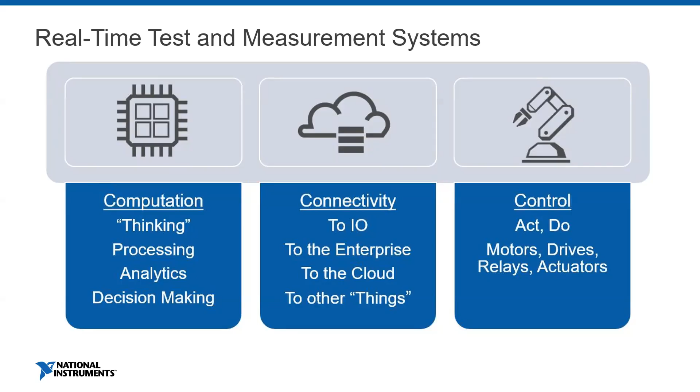Cuando hablamos de sistemas de test y medida, pues son muy amplios, por supuesto. Entonces, los ejemplos, algunos de los que da National Instruments, los pone muy de ámbito industrial. La verdad es que yo he visto también sistemas de tiempo real totalmente válidos en laboratorios de investigación, laboratorios docentes incluso. Simplemente aquellos que se necesite esa recogida de datos, una computación y una respuesta dentro de un tiempo límite más o menos asignado, que puede ser un segundo o puede ser un microsegundo, pero hay un tiempo.

Entonces, lo tenemos en el domicilio particular también, en casa lo tenemos. La lavadora tiene que funcionar controlando ese giro del tambor a unas velocidades, unas RPMs controladas, si no destrozaría la ropa del interior. Entonces, cuando ponemos los distintos programas de la lavadora, del electrodoméstico, pues estamos asignando unos parámetros y esperamos que ese dispositivo cumpla con esas especificaciones técnicas.

Entonces, no solo es industria, donde se necesita una alta velocidad de entrada y salida, una matemática muy compleja también, sino también la confiabilidad de que ese aparato va a durar años sin fallos. No solo que la medida esté asegurada, eso ya es habitual en National Instruments, la precisión y la accuracy de la medida, sino también ese determinismo en la aplicación.

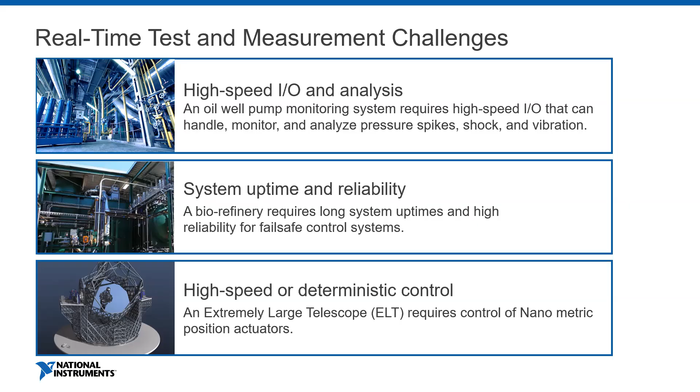¿En qué se basa? Tradicionalmente se basa en un acercamiento o una posición basada en CPUs, en procesador, donde el dispositivo, el sistema, el banco de ensayos, va a tener unas entradas y unas salidas hacia la instrumentación, todos estos bloques azulados: primero unos bloques hardware, un bloque de sistema operativo, los drivers y el software de aplicación. Y normalmente reside todo lo que es el cálculo, la algoritmia, nuestro IP, en este último bloque de la CPU.

Sin embargo, este tipo de acercamiento tiene unas limitaciones de determinismo y de tiempo de respuesta, del orden de unas cuantas decenas de microsegundos en el mejor caso. Habitualmente es bastante más lento, ya que los cálculos suelen ser más engorrosos o hay más capas intermedias entre el sistema operativo, los drivers, el software de aplicación, se conecta a la red, vuelve. Es decir, de microsegundos salta fácilmente a milisegundos y a segundos.

Hay situaciones en las cuales sabemos que esto no es permisible. Recuerdo hace unos años, cuando quería controlar un motor, en ese caso era de Maxon, y ese motor lo intentaba controlar a baja velocidad, ya que me lo permitían los parámetros, el software, la programación, la API. Entonces, sin embargo, le oía un zumbido.

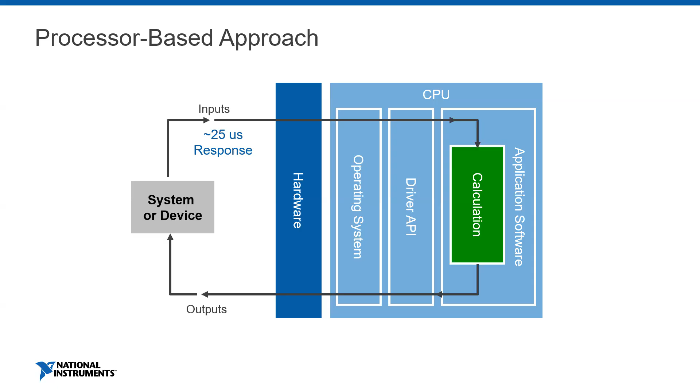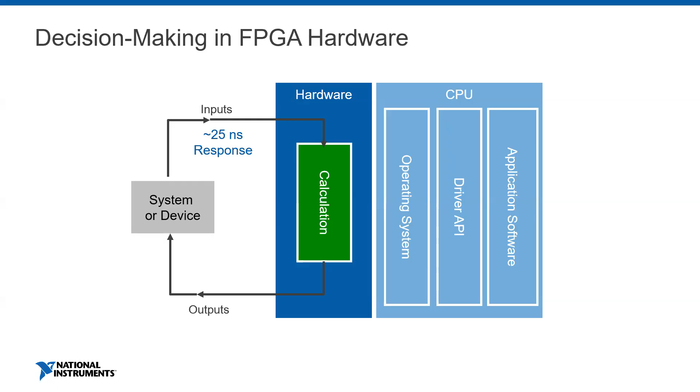Entonces hay situaciones en las que esta CPU no es capaz de llegar. Necesitamos desplazar parte o la totalidad, siempre que se pueda, de los cálculos hacia el bloque hardware, que tiene tiempos de respuesta órdenes de magnitud mejores que los basados en CPU. Obviamente esto es solo una parte de la toma de decisión que se traslada al hardware. Hay otra parte que debe quedarse en la CPU, pues debe comunicarse con otras CPUs en red o hacer otros algoritmos que el hardware no sea capaz.

National Instruments en 2004 salió al mercado con una arquitectura heterogénea en la cual combinaba distintos elementos. El primero de ellos mantenía esas entradas y salidas modulares con todo tipo de señales. Poco a poco le ha ido incorporando el resto hasta llegar a módulos de seguridad funcional con sus certificaciones correspondientes, condicionamiento de señal, puntos de entrada y salida de laboratorio e industriales, con características industriales, etcétera.

El segundo elemento, que era novedoso —no como tecnología, porque las FPGAs, los chips de silicio, Field Programmable Gate Arrays, existían desde hacía muchos años— era la primera vez que se incorporaban en tecnologías de propósito general, y con una forma de programación, que veremos más adelante, tan de alto nivel, tan sencilla, abriendo la puerta a todo tipo de científicos e ingenieros para poder utilizarla.

El objetivo de este chip era poder realizar controles determinísticos de muy alta velocidad, mejorar la confiabilidad del sistema y permitir una extensión del hardware de entradas y salidas que hemos mencionado antes, para que ese hardware acabara no en el dispositivo inicial, no en la instrumentación inicial, sino en esta FPGA. Hoy hablaremos sobre todo de este bloque.

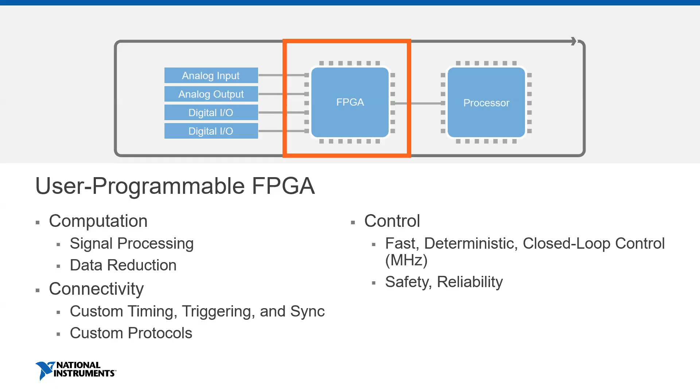Y por último, no menos importante, ese procesamiento de tiempo real, con la capacidad de programar igualmente con lenguaje de alto nivel, sencillo, como pudiera haber sido desde hacía muchos años ese LabVIEW de Windows o en Mac OS al principio, y con todo tipo de librerías, de algoritmia, de patrones de diseño, elementos de conectividad, redes, laboratorio industriales y de comunicaciones e instrumentación, etcétera.

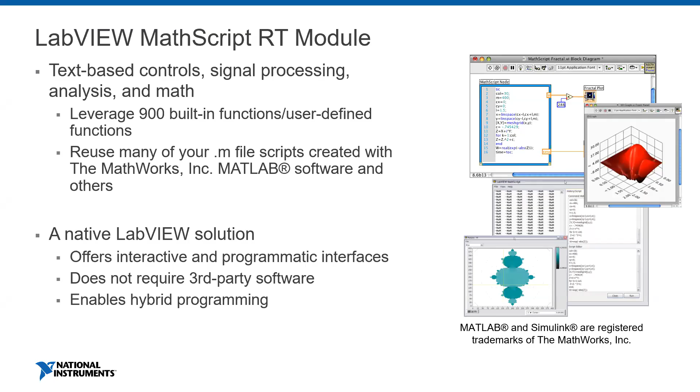LabVIEW Real-Time incluye muchísima matemática, y entre ella también la parte de matemática textual con el MathScript. Este código queda visible, es decir, no es necesario compilarlo, generar DLLs, y directamente lo tendríamos visible en el VI, y directamente lo podemos compilar y poner en marcha, de forma que esa depuración de código, ese ir y venir desde la idea hasta el producto, se acelera muchísimo. También tiene la capacidad de combinarse con otros entornos de programación y simulación, tipo MATLAB, tipo Python, etcétera, que ya lo hemos mencionado.

Otros módulos interesantes para temas de simulación: el Control Design and Simulation, Model Interface Toolkit, para interconectarse a distintos módulos o lenguajes e interfaces de simulación, de creación de modelos. Algunos específicos para temas de simulación de motores, robótica, máquinas de estados, etcétera.

Y naciendo poco a poco, cada vez con más posibilidades, en todo el tema de inteligencia artificial, empezando con el Machine Learning. Machine Learning, como sabéis, lo que busca es, con pocos datos de entrada, poder tomar decisiones importantes, inteligentes. Es decir, no se basa en un gran aprendizaje profundo, un deep learning, sino lo que busca es que con poca información de entrada y con variabilidad alta, poder dar respuesta de una manera más o menos inteligente.

Esto es algo típico en líneas de fabricación en las cuales no tenemos el tiempo de ir a consultar esa base de datos gigantesca de aprendizaje previo, a lo mejor porque el takt time no es suficiente como para ir a preguntarle, a lo mejor porque no hemos pasado suficientes piezas de ese producto como para decidir qué es un patrón correcto y qué no lo es. Entonces son otras técnicas, con redes neuronales pequeñas típicamente, etcétera.

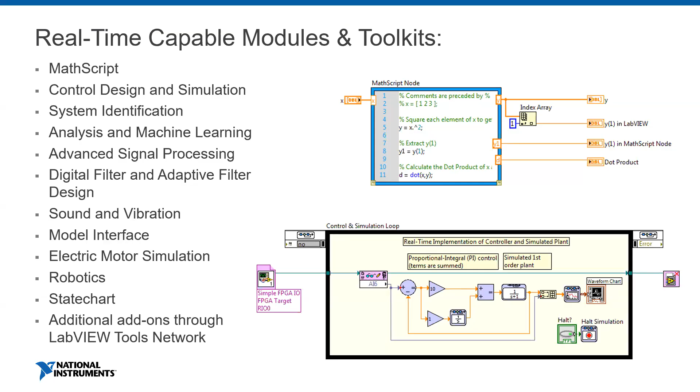Desde hace unos pocos años se pasó de lo que eran sistemas operativos ETS, Phar Lap y VxWorks a las nuevas generaciones que ya llevan un sistema operativo Linux con extensiones de tiempo real. National Instruments le añadió todo lo que eran los drivers alrededor del hardware, de forma que fuera transparente poder utilizar este nuevo sistema operativo con mayores capacidades gracias al ecosistema: temas de gestión de redes, configuración, seguridad, matemática, etcétera, para poderlo añadir al hardware ya existente, reutilizando la misma metodología de programación de LabVIEW Real-Time que ya existía antes.

Entonces, de forma transparente se ha podido ir pasando de un tipo de sistema operativo a otro a medida que ha ido evolucionando la tecnología y ha ido permitiendo estos saltos tan importantes.

Cuando juntamos ambos bloques, LabVIEW Real-Time con el previamente descrito LabVIEW FPGA, lo que tenemos es una combinación muy poderosa. Incluso hay soluciones en función del chip que son capaces de tener ambas arquitecturas dentro del mismo sistema, el mismo chip. Son los llamados SoCs, System on Chips, en el caso de Xilinx con la arquitectura Zynq. Y en el interior de un único chip se pueden tener ambos sistemas con una arquitectura ARM.

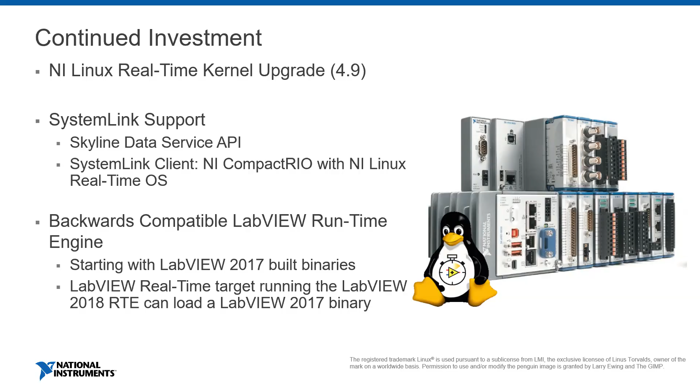En el apartado de DAQmx, decir que es tanto para Windows como para Real Time. Es decir, Óscar, a la pregunta que hacías en el chat, sí, DAQmx se puede utilizar también en Real Time dentro de estas arquitecturas de CompactRIO. He recomendado la sesión, la primera que hicimos hace 2 semanas, donde tocábamos este tema en profundidad.

No entraré ahora al detalle, por no repetir. El único elemento que sí voy a comentar es que cuando hablamos de determinismo, el determinismo no acaba en el propio sistema. Hace relativamente pocos años apareció una serie de tecnologías, entre ellas destaco TSN, Time Sensitive Networks, que es la capacidad de las propias redes de comunicaciones, ese Ethernet, de transmitir de forma síncrona, con alto determinismo, conjuntamente gracias no solo a estas CPUs con esos drivers y esos puertos modificados de Ethernet, sino también gracias a los routers, no aparecen en la imagen, de distintos fabricantes, que le añaden la capacidad de gestión inteligente de los datos que circulan por ellos, permitiendo mezclar las redes de tecnologías de la información con las redes de tecnologías operacionales, de OT, de fábrica.

A modo de ejemplo, menciono una demo, una maqueta construida conjuntamente entre múltiples fabricantes, en la cual se ve cómo se está transfiriendo una película de alta definición entre 2 nodos de esa red y simultáneamente por la misma red está circulando señales de control de máquina. Por tener esa ingente cantidad de datos de la película de alta definición no significa perder el control de la maquinaria. Si tiene cabida en cuanto a ancho de banda global, un buen gestor intermedio y unos puertos adaptados permiten que se pueda transmitir simultáneamente, algo que tradicionalmente estaba prohibido. Esa mezcla de redes, hoy en día, gracias a estos routers, estos switches inteligentes, ya es posible.

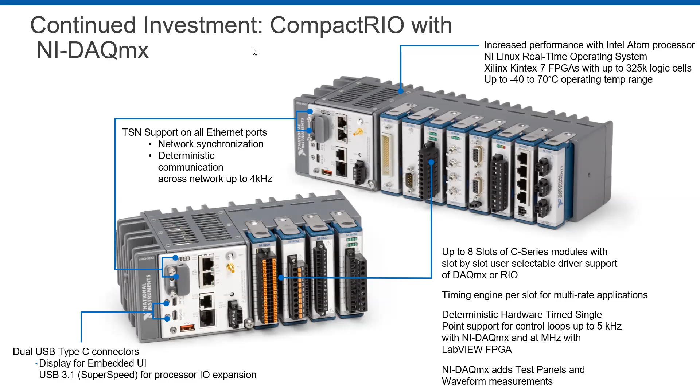Sin más, paramos el primer bloque, que sería más teórico, más del estado de la tecnología. Abrimos turno de preguntas corto y seguimos con las demos, ¿vale?

¿Preguntas? ¿Comentarios? Podéis lanzar la pregunta en el chat o abrir micrófono, aprovechando que estamos en familia. Nunca mejor dicho, ¿eh?

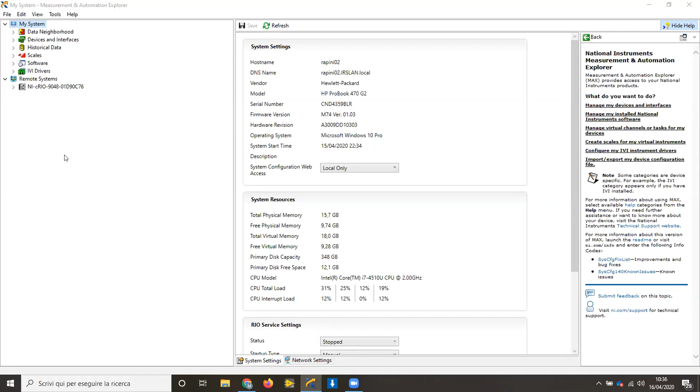I click here. Okay, this is one of the latest versions of CompactRIO, and it's very useful because you can connect the system through a USB Type-C connection. If you see, I have 2 Ethernet ports and I have a Type-C. You can connect without the help of the IT manager. You don't have to change the IP address. It's very, very useful. You connect directly, and the system simulates an Ethernet. If you see, you have a static IP address. This is the number. Okay, so I prefer to use this.

Okay, it's connected. If it is the first time that you connect the CompactRIO, I suggest you update the firmware. Updating the firmware means that you click and you find it directly in your PC because you have already downloaded the NI CompactRIO driver. So forget going to Google or forums to search for a new firmware. For me, if you see, it is the latest, so it's enough. I go under Software. Okay, a few seconds, and if you see, I have already installed the software.

So if I define a single-cycle timed loop, here you have the possibility to change the ticks. The tick is the elementary part of your system. In this case, if I have the top-level timing source, I have 40 megahertz. If I want another timing, I can choose 20 megahertz. If I want another single-cycle timed loop, I can decide to have 40 megahertz.

Now, if I have different single-cycle timed loops, if you are not an expert, you can make some mistakes. For example, which is the technology that I can use to move data between single-cycle timed loops with different clocks? It depends. Can I use a FIFO? Can I use a memory? It depends. When you attend an FPGA course, the professor shows you which technology you must use. This is a typical mistake that a beginner like me can make.

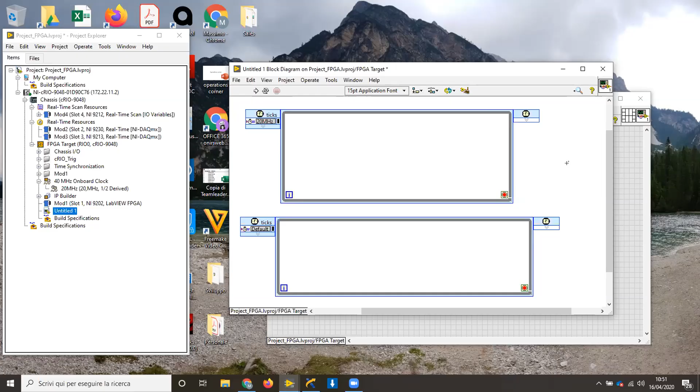So in this case, I don't want to use a single-cycle timed loop because I'm acquiring from an analog input module where the ADC is 10 kilohertz. So there is no meaning to use a 20 megahertz clock with an analog input in my case. Okay, I create the right clock. I can create register, memory, FIFO, handshake. In your FPGA, there are many features that you can create.

In this example, we will use the FIFO, and here the FIFOs are very interesting because I have the possibility to create a FIFO that is running only in the FPGA part, but I can create a FIFO that goes directly to the real-time part. It's a sort of DMA, so I acquire data in the FPGA part, and I transfer the data that I acquired directly with a DMA FIFO to the real-time part. So we create my FIFO directly.

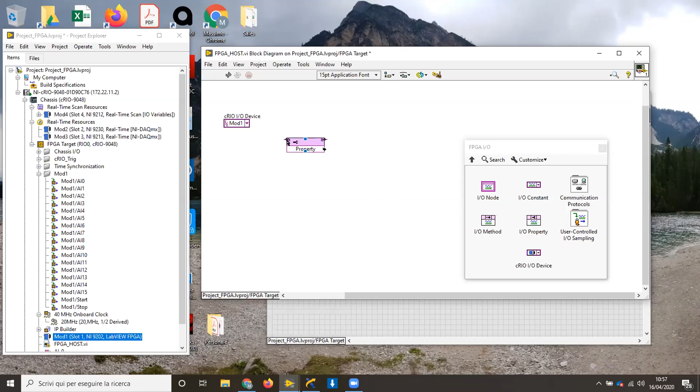Then I take a property node, and I connect the cRIO device with the property node. It's better, with the right click, to show error terminals, and I will explain why. Here I want to configure the data rate and the filter frequency. Data rate, in this case, I put a constant, and I will use the maximum frequency for this module. And the filter frequency is a sort of divider of my module. In this case, it's good like that.

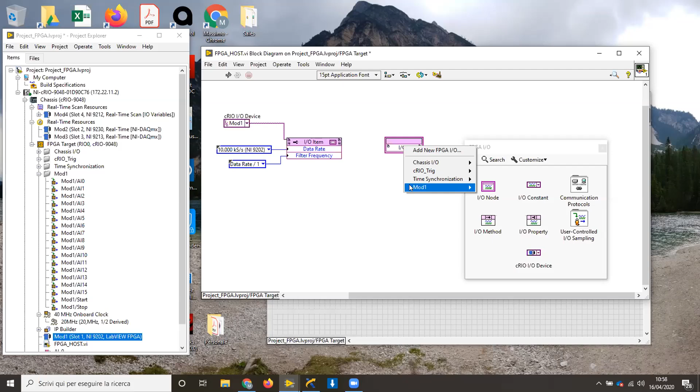Then I must start the module. How can I do that? With the I/O node. The I/O node refers to the FPGA. If I click here, Mod1, I go to start. Before I said that it's better to show the error terminal, because I use the error terminal to create a sort of sequence. Now here I create a constant. Okay, true.

If you want to create an I/O node and not do it directly like this, it's possible to create an FPGA I/O, and connect the FPGA I/O to the I/O node, but it's the same. If you want to use it like this, it's not a problem. Okay, now I configured the module. I started the module. Now I must start to acquire the data. So I create a while loop.

Remember, I don't use the single-cycle timed loop because I can't put an analog input of this module in a loop of 25 nanoseconds. For example, if you use the FPGA part for power electronics, for digital inputs and outputs you can use a 40 megahertz or 20 megahertz clock to switch your switch on and off. In this case, I use a traditional while loop, and inside it I will insert a sort of delay.

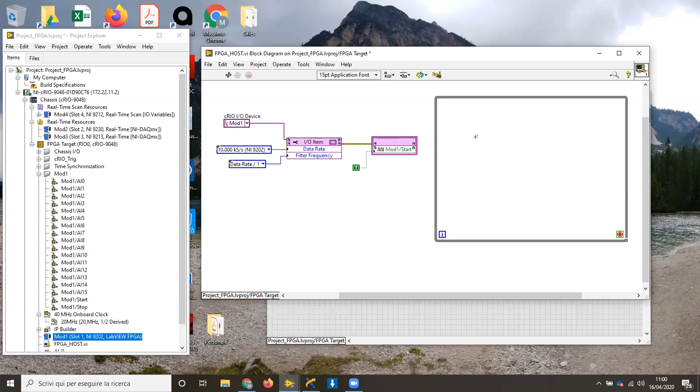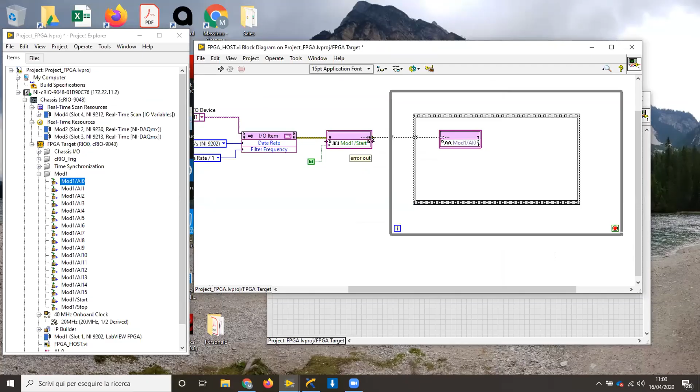Here I wanted to put a flat sequence structure. Okay, perfect. I move. Now I want to read from the module. I continue with the error terminal. Right click, and I connect the error terminal of my module. In this case it's not important to create an FPGA I/O because I have only this module. I drag and drop the module directly, so I have the information.

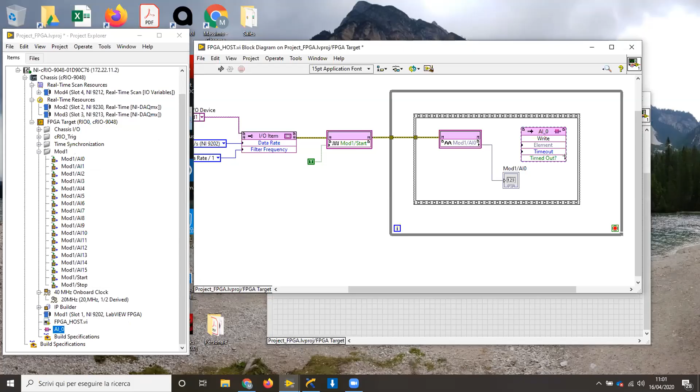Then obviously I want to show the data, so I create an indicator. As you see, I have a fixed point, because with this kind of module I will have a fixed-point output. And if you remember, I created the FIFO with a fixed point. So if I drag and drop, I have my element directly. In this case, okay.

Here I go directly with... I continue with the error terminal, okay. And I put my value on the element. I don't want the timeout, I put 0, okay. I don't want the timeout. And here I add a sequence after, okay. And here I put a delay.

Remember that I'm using a software, but this software becomes a hardware part. Okay, so I'm doing a sort of design of the FPGA. I'm not programming, not developing the FPGA. It's a sort of design. So here I put the delay, the timing. In this case, a loop timer, and I can decide if I want to use ticks, microsecond or millisecond. In this case, I put microsecond, and okay, pay attention.

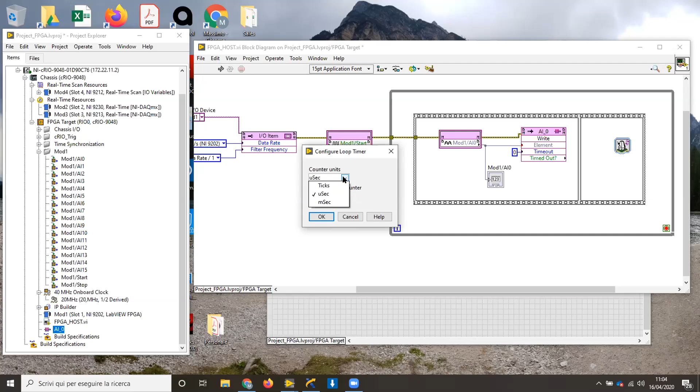Okay, so in this case, I'm not considering optimization, but if you attend the course of FPGA, you will learn how it's possible to optimize your FPGA. In this case, for me, this is microsecond, and 16-bit for me is enough. Here, I want to create a control, and now I explain to you why. Because all the controls and the indicators that you create in your FPGA part, after you compile the FPGA, will be a sort of pins of the FPGA.

It will be an output of my FPGA, and it will be an input of my FPGA. So when I call the bit file of this FPGA here in the real time, I will have input and output. I need another one, this, and I create a control, and for me it will be stop acquire. Okay. So I will have a command in my real-time part, and by changing the value from false to true, I will stop this loop inside the FPGA.

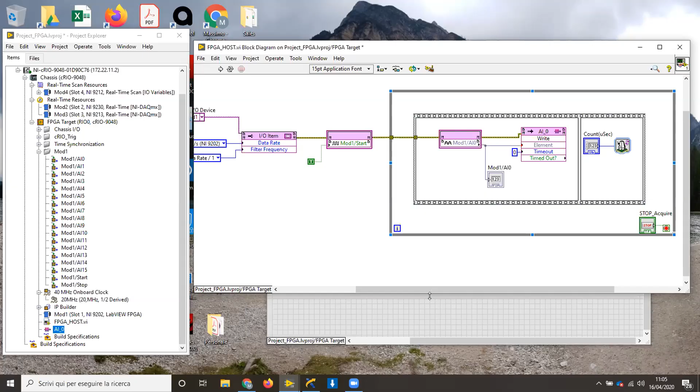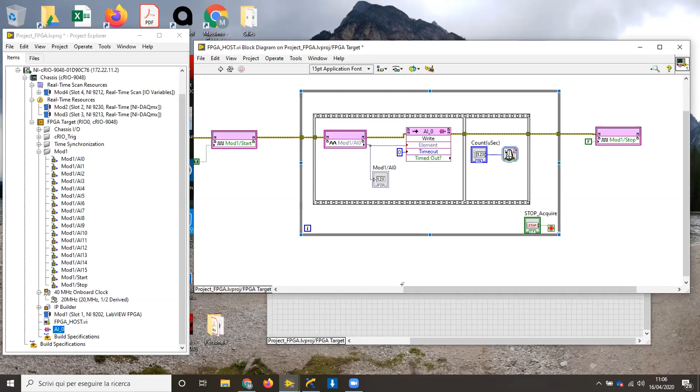I continue with the error. Okay, I go here. And then I can perform the stop of the module with the IO node. Yes. Show error. And here I will choose Mod1, stop, create constant. Okay. I think that I finished. Then I will choose the count, the microsecond, and so on. But it's not important, this part of the software. I reduce it a little bit only to understand if it's possible.

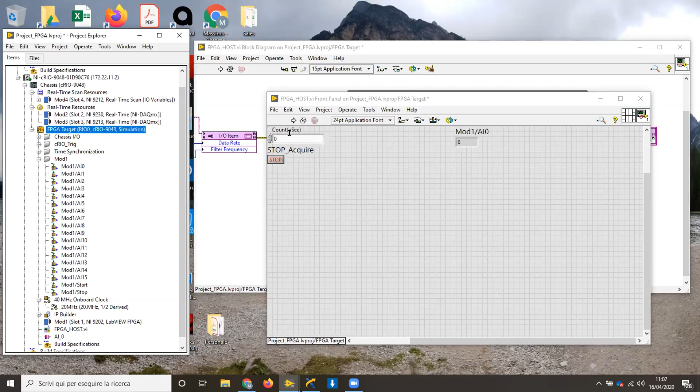Okay. Now if I click run, obviously LabVIEW starts to compile through Vivado, to create the intermediate file, the VHDL file, and deploy all my FPGA. But if I wanted to simulate this part, it's possible. I go to the front panel, I go to the FPGA part, execution mode, simulation, simulate IO. So if I click run, here I put, for example, 100. Okay.

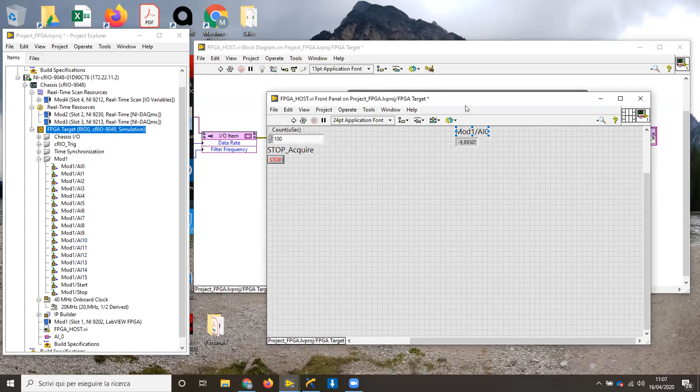You must understand that now this is a very important part. So I'm sure that after the compilation, if there aren't problems with the hardware part of my module, this part of the FPGA will be correct, because with the simulated part I'm checking, and LabVIEW tells me, okay, it's all okay, it's possible to run.

Why do I do that instead of clicking run with the FPGA target? Because if I click run, I compile, and with my PC and this hardware I'm working with, the C series module, I will wait 20 minutes. Imagine that, for example, I made this mistake. Okay, I made this mistake, and after 20 minutes, I discovered that in this case I will have only one loop. I change it and I must wait another 20 minutes to compile.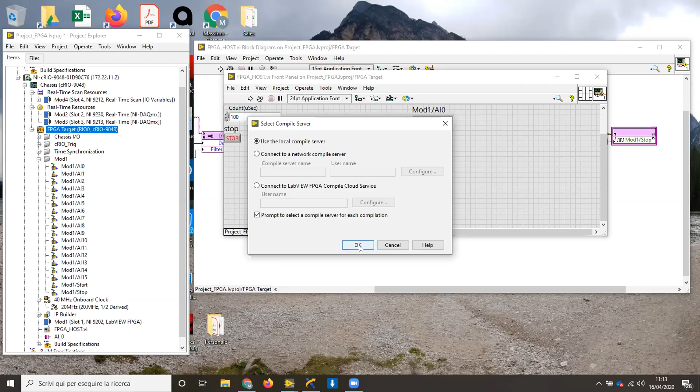Okay. And in this case, you can use the compile cloud. For example, you don't have a very fast PC, or you don't want to install Vivado on your personal computer. You can use the compile cloud of National Instruments. So in this case, you click OK, and the software starts and Vivado starts to compile. You wait 20 minutes, or it depends. It's not fixed. Obviously, it depends on your software. In this case, I don't compile because I have already compiled the software, and I will open the project that is the same.

Sorry, I don't save. I have already created Sviluppo webinar FPGA Spain. Okay, this is the project. If you see, I create an FPGA main, host main, RT main, and in the FPGA bit file, I have already compiled. I did the last compile this morning because I changed something. It was compiling during the webinar, because obviously you can continue to use your personal computer during the compile. So this is the software that I made.

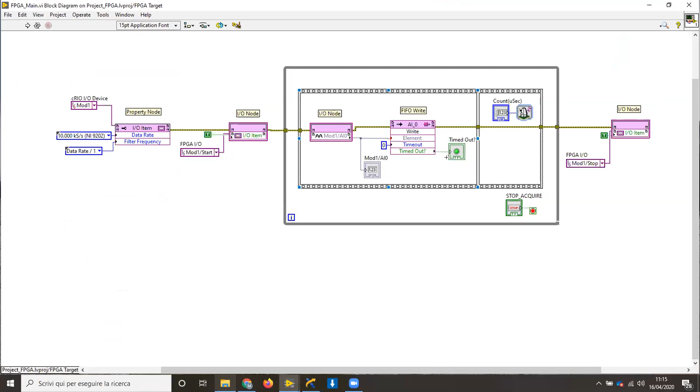Which are the differences? This is the FPGA main. If you see, it's equal. I put some comments, but it's totally equal. I put an indicator on the timeout, but it's not very important in this case. I close because it's better not to move anything, because if you move something, you must compile. I have the FIFO, it's the same. I created it with the same name. If you want to see, it's target to host, the dimension is the same.

I created a real-time part. In this real-time part, I have the part of the software that is connected with the FPGA. This is the first one. And in this part, I wanted to create a real-time part with DAQmx with another channel, with another module. This is the first webinar that we made, so I don't want to replicate the webinar, but I spent some minutes on this part.

I used the FPGA palette interface, and in the real-time part, I use the Open FPGA VI Reference. So I click here, and with a double click, I decide to use a build specification of my FPGA, or a VI, or a bit file, because probably your colleague has a new bit file, or you compiled a different bit file you want to test. But you can decide to use the VI and the build specification instead of a bit file if you are developing.

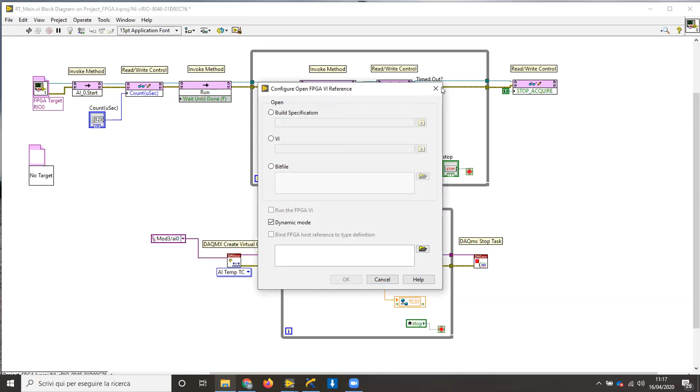At the end, when you create the real-time application, you must use the bit file. But for the moment, for me, it's enough to use this.

Then I use the invoke method. The invoke method is referred to your FPGA part. In this case, you have access to the FIFO. You can run the FPGA. You can reset, abort, and download the FPGA.

I start the FIFO. If you see, the first step was to start the FIFO. Then after the FIFO, I made a configuration, and I use read-write control.

Read-write control is referred to the bit file, or the FPGA VI that you create. If you see, I have controls and indicators that I put in the FPGA. For example, this is a control, this is a control, this is an indicator, this is an indicator.

If you go to the FPGA part, you see those controls and indicators here as inputs or outputs on my read-write control. The first was, I put the delay, and it is the frequency in the FPGA, okay?

Then I use another invoke method. This invoke method is to run, to start the FPGA. Okay, if you see... sorry... to run the FPGA.

And in the host main part, I want to access with this, this is the palette. It's very easy to do with data communication.

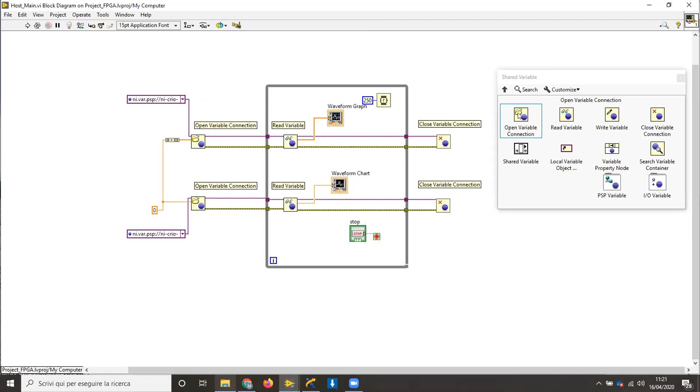With the shared variable, I use open connection. Okay, let me enlarge a little bit. If you see, analog input and this is thermocouple 01, the two shared variables. I open and I read.

This is only a sort of supervisor that is running in the host. Remember, if it's the first time that you use the shared variable, it is not the unique technology to transfer information from the real-time and the host part. For me, it's easy to use, but if you want to use a socket or also a data socket, you can use the data socket.

Remember that you must connect the data type of the elements that you will use in the shared variable. For example, I have a double, or fixed point, but there is no problem here to have such as a double. Here I have an array because, remember, I have the FIFO, and here I have a constant. Now, if I start the real-time part...

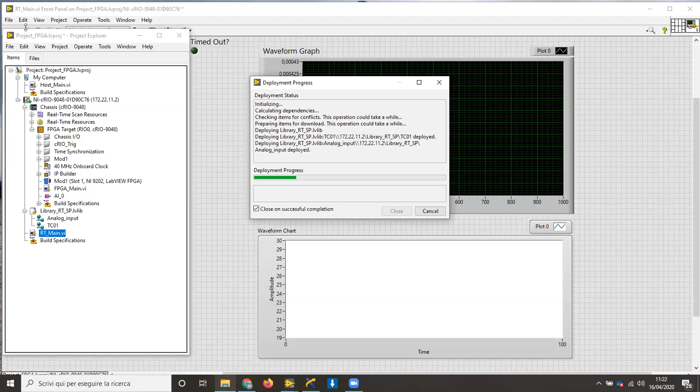I put 100 microseconds. I didn't change the FPGA.

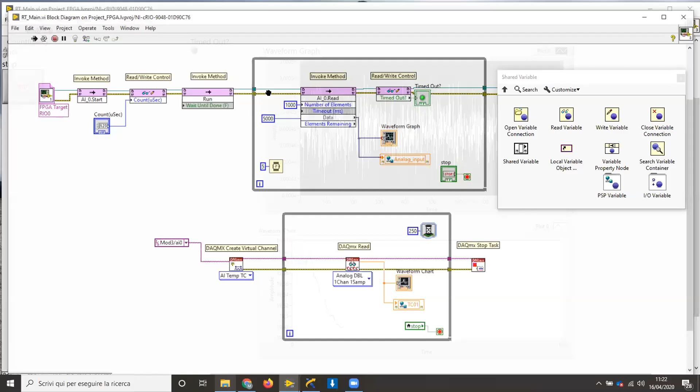If you see, I'm not acquiring data from the real-time part, because here I don't have an acquiring part. I have the acquiring part only for the DAQmx part. Now I'm touching the temperature of my thermocouple, and the analog input, I connect only a wire.

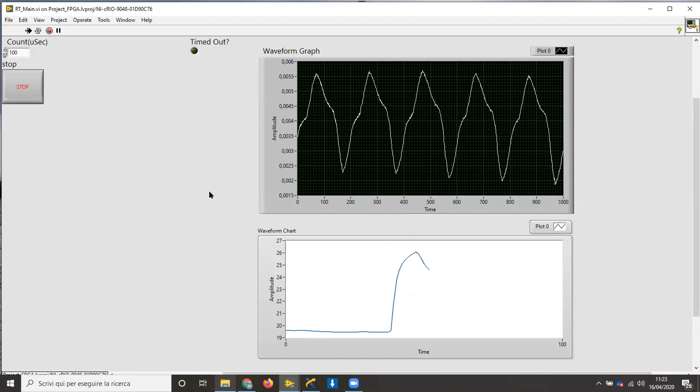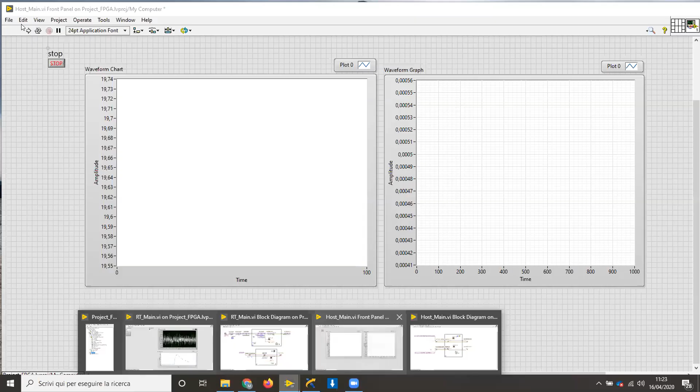So if you see, I have my hand here, and I have 50 hertz noise. If you see, the host part now is not running, because I can decide to start the host part when I want, since it's disconnected. It's not connected directly to real time because I'm using the shared variable.

This is a typical example, a very easy demo. It's not so difficult, because you have three steps.

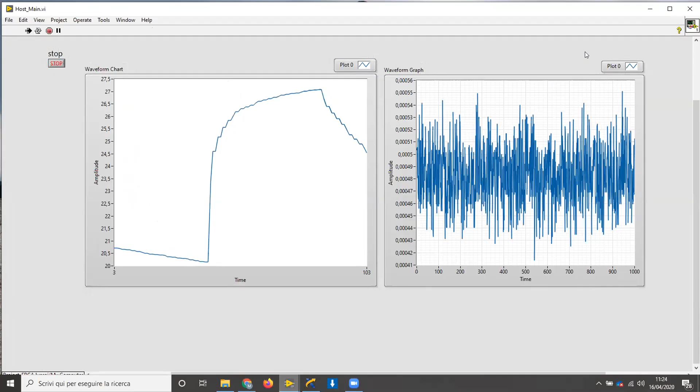You have the FPGA part that is running, it's hardware that is running. If you see, I don't have software running because it's on the FPGA. I have the real time part. If you see, I can stop and start this part when I want because the real-time part is running. In this case, the real-time part is running. When you create the exe file for the real time, you can set it to run at startup.

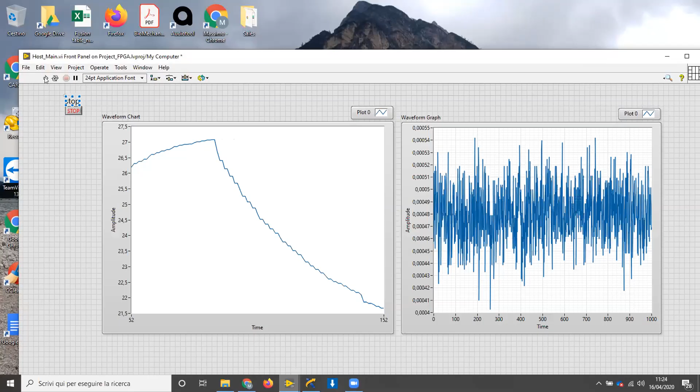So when you connect the power supply to your real-time system, it starts, and if you want, you can connect your host part with a shared variable to see the variable. In this case, I only read, but if you want to stop the real-time part with a control, you can create a Boolean shared variable, connect it to the real-time part, and stop from the host. But I don't know if it's a good idea to command the real-time part directly from the host PC—it's your application and your choice.

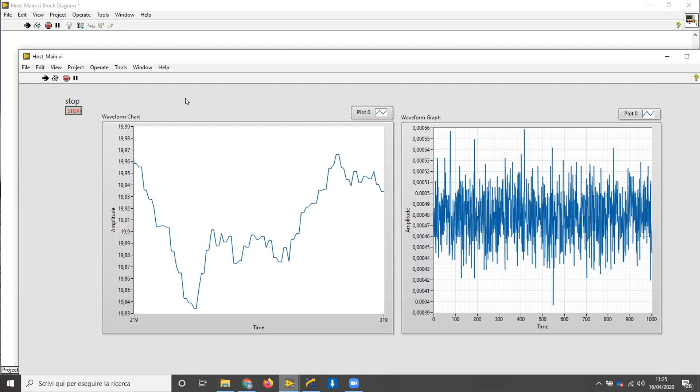We have 5 minutes left. I hope this demo was enough to understand the possibility to develop with the FPGA part. Obviously I'm not an expert, I'm not a developer, I'm like Guillermo, a salesman, but I like to do this kind of demo. If you're interested, I suggest you follow the courses of National Instruments for Embedded, for FPGA, and for the real-time part. Guillermo, for me, that's all.

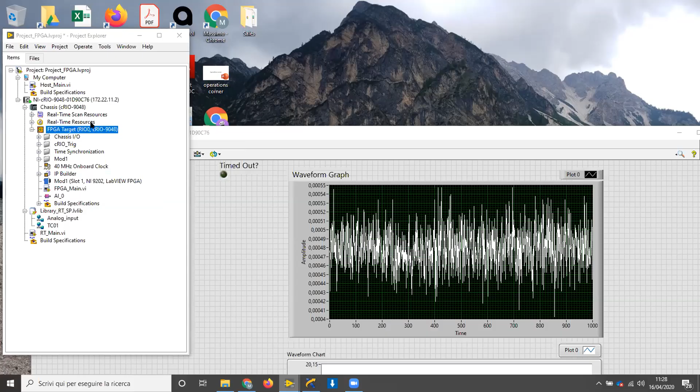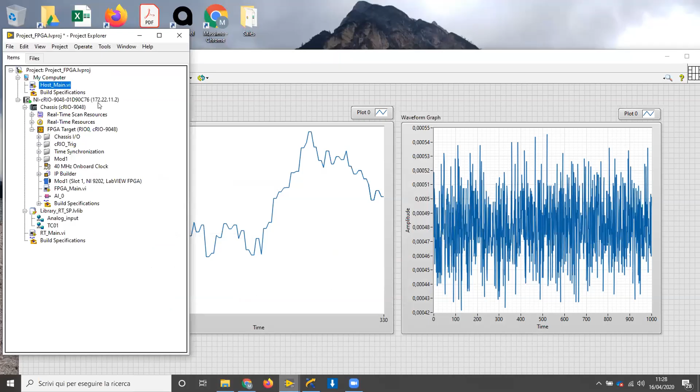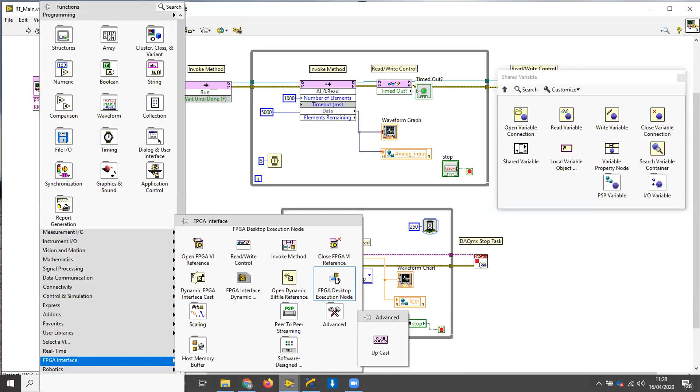Okay, no, yes. Sorry, here—it is this FPGA desktop execution node. Yes, you are speaking about this.

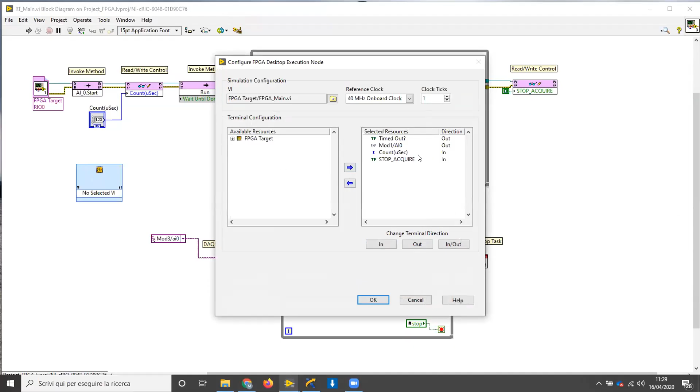Yes, it's possible to simulate. You go into the real-time part, right-click, FPGA interface, FPGA desktop execution node. Here you choose the FPGA, and you have, for example, the timeout mode. You decide which are the inputs and outputs, and here you have the core of your FPGA.

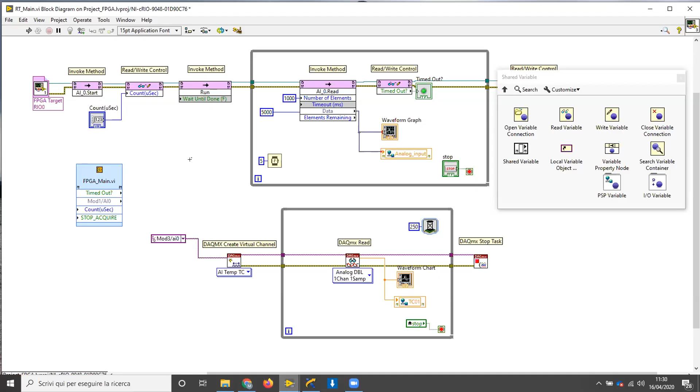Guillermo, regarding the last sentences, I suppose it's possible only with the RIO board, the PCI Express, because in the CompactRIO you have different C-series modules, and it's difficult to simulate the real I/O data in CompactRIO since you can choose different C-series modules. When you buy a PCI RIO board, you have only this input and only this output. I think this is the answer.